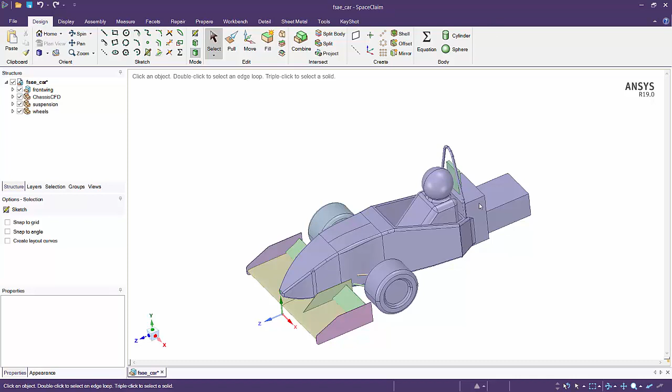So we've just deleted everything that wasn't relevant. We've got the front wing, the wheel, suspension components, and the chassis as well.

How is it on your end, by the way? Is it a little bit laggy, Tim? Yeah, it jumps around a little bit when you rotate, but it's mostly not too bad.

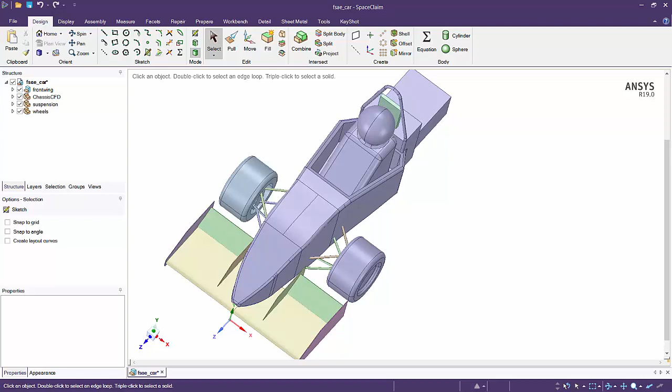Awesome. So for reference, this is a geometry that I created specifically for CFD, because we didn't have anything, and the CAD that we had was just way too dirty for me to actually use.

So before we do anything, before we create a domain, we're going to go into the repair tab at the top. In my case, on the left-hand side, I've got all solids, the structure tree, and I've gone through and actually named everything. So I'm not going to need to stitch or remove any gaps or fill in any missing faces.

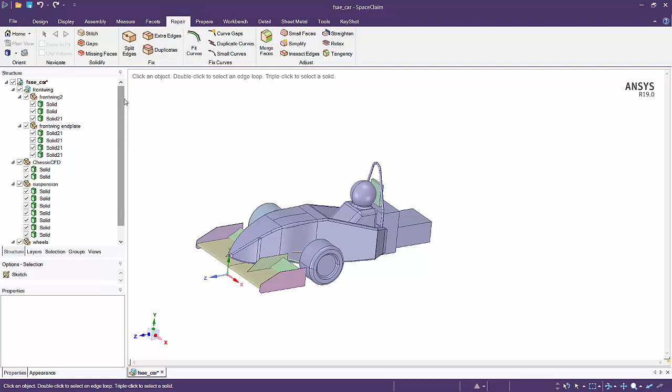If you did have a surface, you'll see that come up, it'll actually say surface, and you may need to do that. One of the things I might need to do is fix my split edges.

So I'll go through from the left-hand side, normally clicking on split edges. I can see here there's a note saying 2 split edges found. I can click on each point to simplify, or just fix them all using the complete button.

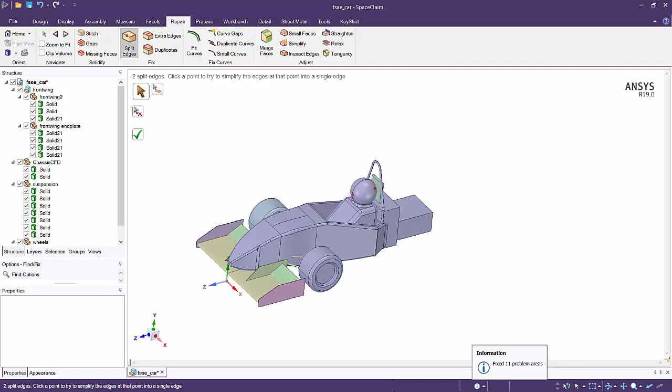So if I select that, on the bottom you can see it was just loading, and on the right-hand side it shows fixed 11 areas. Afterwards I can go through and individually select these buttons to tighten the tolerance. I've also got some options on the left-hand side if I wanted to increase the tolerances even more, but that's not really a big issue, so I'm just going to escape out of it.

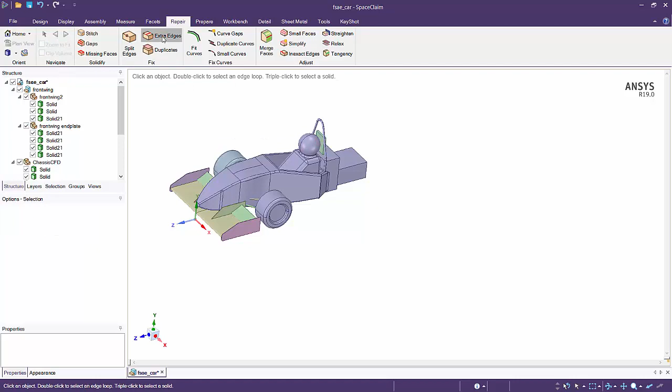If I've got any more extra edges, you can see we've got a couple that have come out. So instead of going through them individually, I'm just going to click the tick button, and you can see it's resolved all of them.

Awesome. I don't really have any need to fix any curves, not really going to need to merge any faces. This is an important one though - fixing any small faces.

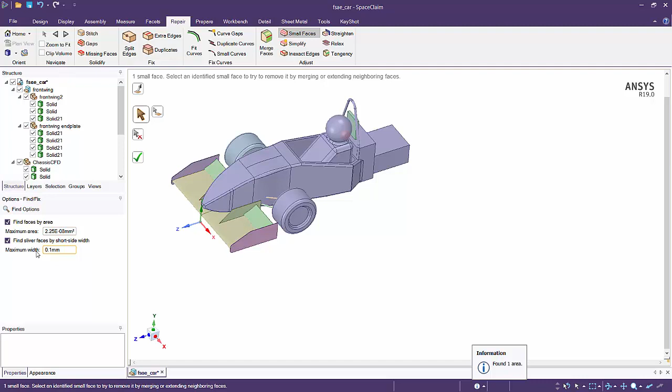On the left-hand side, we can see we've got a maximum area, or a sliver face area as well. In this case, if I rotate the model over, we've just got a really small face that if I click on manually, it should close itself up.

Again, if I need to simplify anything, I've got a couple of things I can simplify there, but I haven't found it to be a big issue, so I'm just going to leave them. And there's inexact edges too - these are all things you personally may not see, but the solver, the geometry modeler, and the mesher will definitely pick up. So it's important to go back and make sure you fix them all.

And that's pretty much it for the moment. So I've gone through my whole repair tab, and now what I'll do is go into the prepare tab at the top.

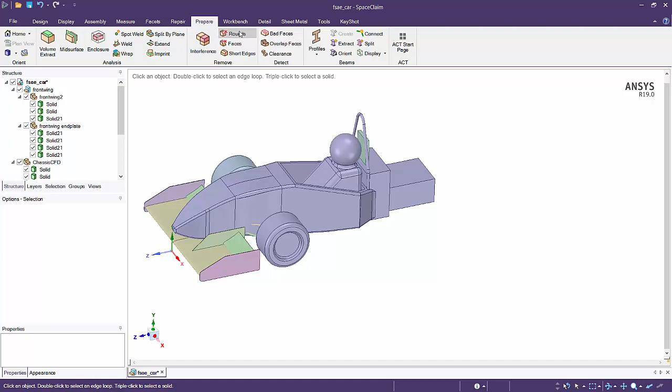So you can see I've got this enclosure function here, plus a couple other functions I can look at and use. There's an interference tab, and I can delete rounds, faces, remove short edges.

So if we select on that, we can straight away see there are a couple of short edges that have been picked up, and I can increase the max length if I wanted to. For this particular case, I'm just going to tick complete.

Awesome. If I need to detect anything, I can do it here as well.

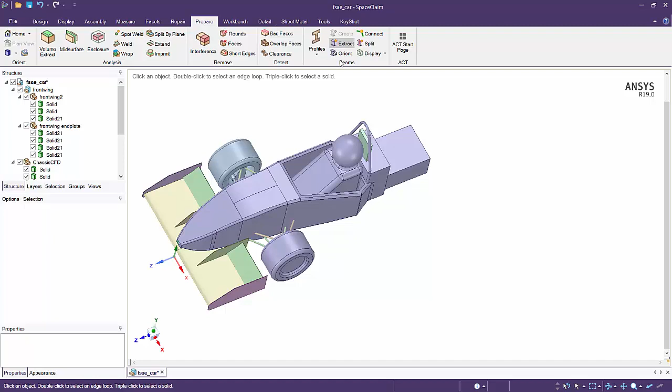So as we were previously talking about, we're just going to set up a model that's parallel to this car, so it's just going to be going in front. Due to that, we can take care of the fact that this whole model is symmetrical.

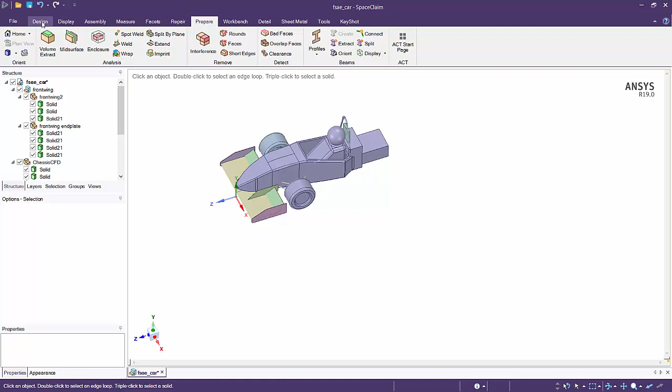So we can actually cut the model in half and run a half car model. I'm going to go over to my design tab at the top. I'm going to create a plane down the YZ axis, and split my body down the middle, then delete one half. To create a plane down that axis, I'm just going to control select Y and Z, hit my plane button. Awesome, and I've created my plane there.

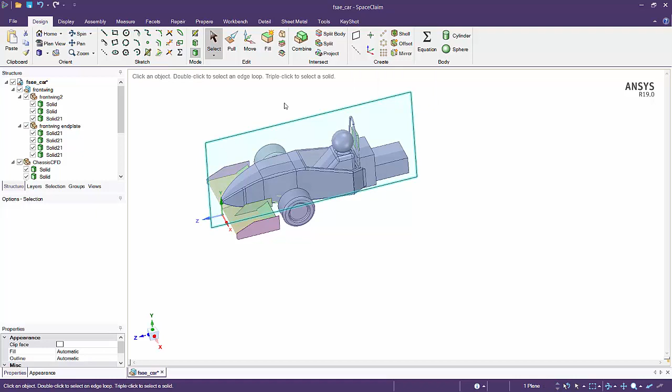On the left hand side, if I just minimize all these, you can see there's a plane that's been created. You can see exactly where it's highlighted and where it splits down.

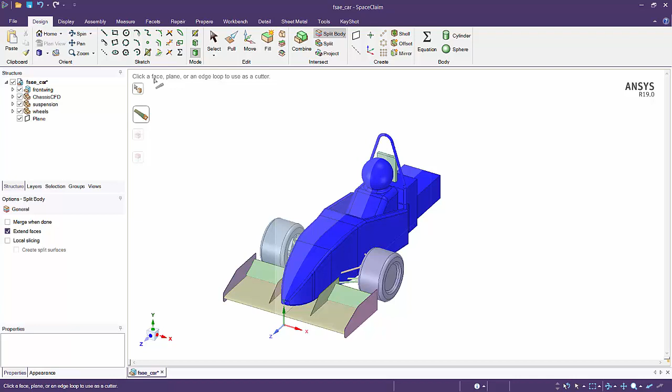Now what I'll do is split the body. I've got a split body function here. It's telling me I need to click the target object first, so the first one I'm going to select is the chassis itself. Then it's asking me to select a face, plane, or edge. On the left-hand side, on the Structures tab, I'm just going to select that plane. You can see it's cut in half. If I have a look at my chassis, I can see I've got two bodies now.

And it's also allowing me to remove a region, so I'm going to select the left-hand side. I'll click it, and I can remove it straight away.

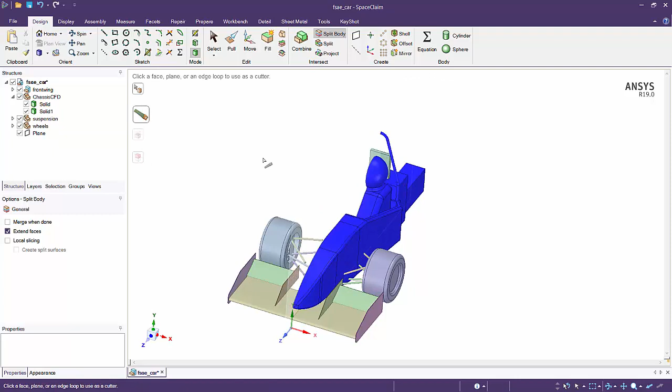All right, let's have a look at this wheel over here as well. I'm going to delete that in a different way. I've got the suspension. If I highlight one of the bodies on the left-hand side, you can see that they highlight in the geometry plane as well, so I can see I've got one highlighted there, and if I right click, I can delete it.

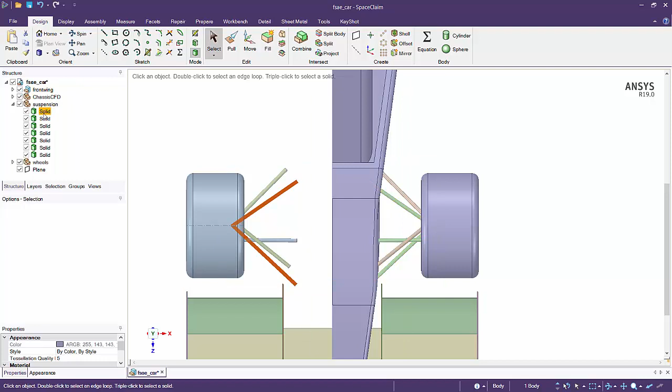Now this top A arm, instead of clicking it, as soon as I highlight over it on the left-hand side, the structure tree lights up as well. But what I can do is triple click it, and you can see the whole body lights up. I can see on the bottom right-hand side I've got a selection filter telling me one body is selected, and instead of going right-click delete, I'm just going to hit the delete key on my keyboard. It's super easy to delete all of that as well.

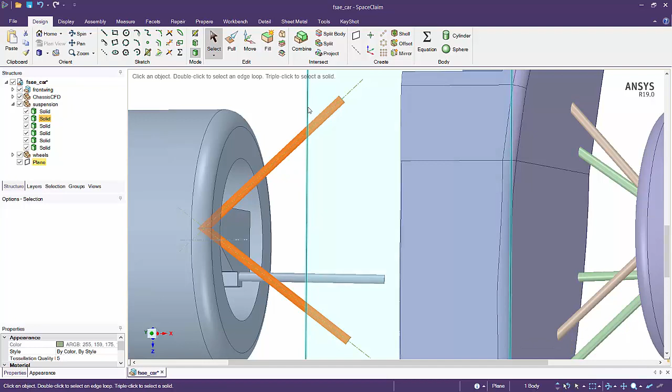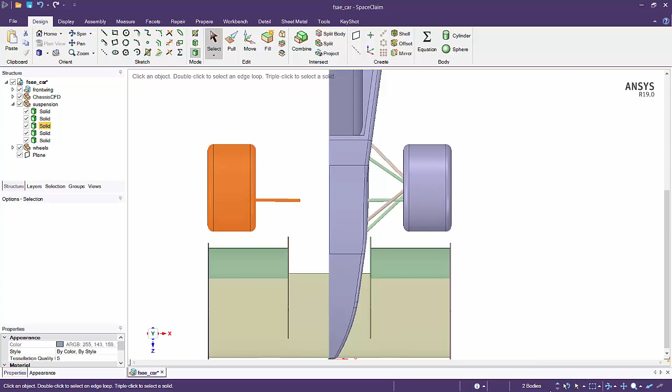Another way to do it is I'm going to select this whole wheel. If I create a box select from the bottom right to the top left, I'll select the whole body, and you can see I've selected two faces here as well. So I'm just going to click out of that and redo it. I've selected two bodies now, and I'm just going to hit delete. Awesome, so I'm just cleaning up the model as I go.

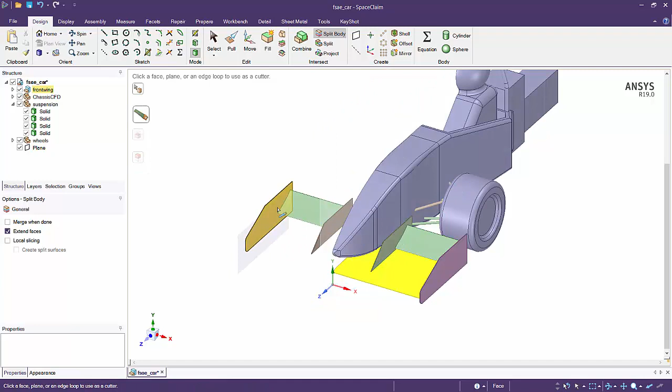Again, I don't actually need this, so I'm just going to triple click, hit delete, and I've still got the wing, which I haven't cut up. If I triple click on that, I can see the whole body lights up. So again, I'm going to go split body, select this, I've got my plane, and I'm going to remove that. I'll escape out of it, triple click this, triple click the wing and the end plate. I can see on the bottom right I've got three bodies created, and I'm going to delete that as well.

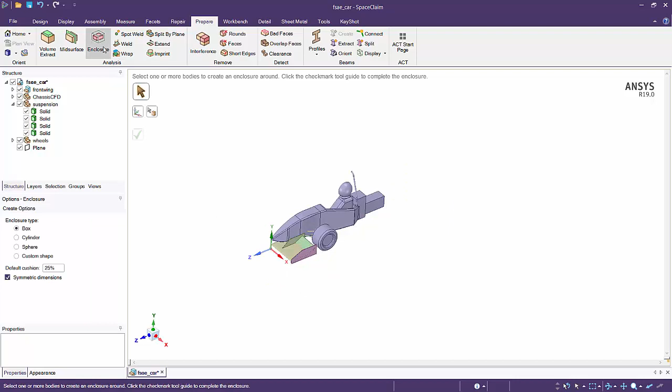All right, so now I've got my geometry prepared, and I'm going to create my enclosure. I'm going to go to the Prepare tab, select Enclosure, select all the bodies, and I've got an enclosure automatically created for me.

Now on the left-hand side, you can see that I've got some options. I'm not going to make it symmetrical, so you can see I've got a lot more tabs that come out. The very first one is just the inlet dimension. The length of the car is around 3 meters, so I just try to make sure if I'm making any dimensions, I make it as dimensionless as possible, almost.

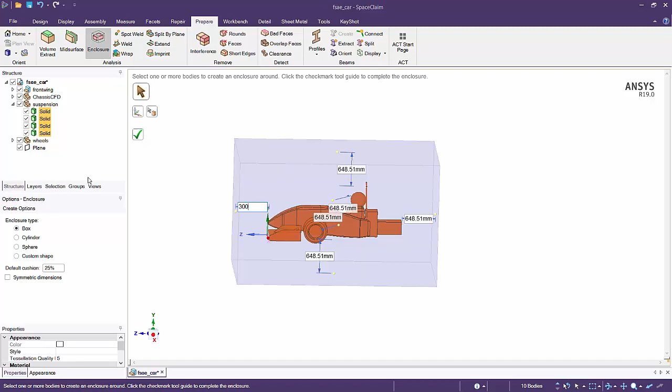So I'm just going to bring it 3 meters in front. I hit tab, and I can see it goes over to my next one. Now I actually want to cut this in half, so I'm just going to leave that as is, and I'll cut it manually. Again, so the width, 3 meters on top. Right, I've got the height, I'm just going to make the height 3 meters as well.

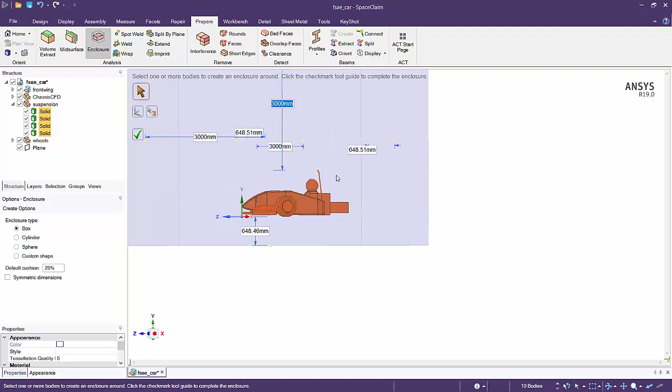So beneath the car as well, I'm going to leave that as is, and I'll cut it manually with another plane. And behind, I'm just going to make this 9 meters. So I can see I've created almost all my domain, and I'm just going to tick the tick button to complete it.

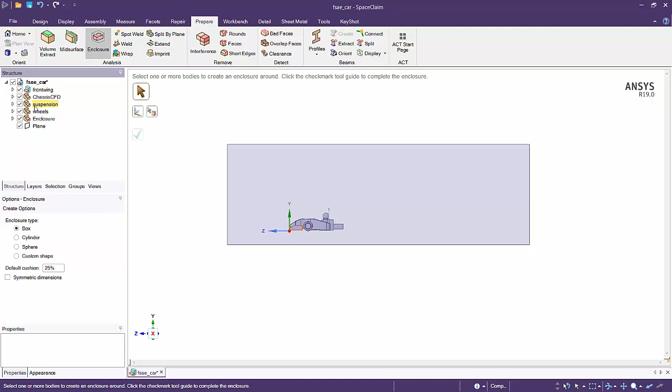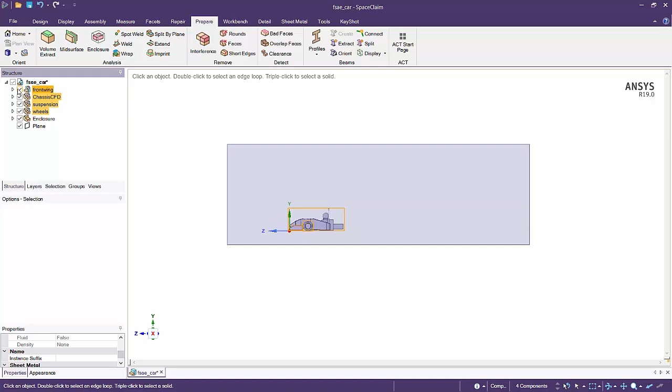What I'm going to do as well is select all these geometries on the left-hand side, right-click, and suppress for physics. This will mean later on when I'm bringing the geometry back into my solver, I'm just going to bring in the actual enclosure and the bodies of influence which I'll create. I'm not going to actually bring in the bodies itself because I don't need them. And if I unselect these buttons, they're going to hide them as well.

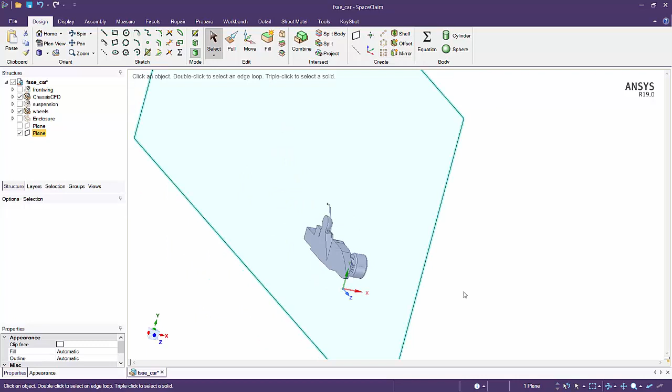So before I do that, I'm just going to hide everything. I'm going to show my chassis and my wheels, because what I'd like to do is create a plane down the middle. So I'm going to select that face, design, hit the plane function. It's going to create a plane for me. And I want to create something around the wheels as well.

So I'm going to select these two axes, create a plane, and orientate myself. Then if I hit the move function, this will allow me to move the plane up or down. Now I'm just going to go back, and instead of moving it up or down using the triad system, I'm going to give it a value. So I'm going to type in -5, which is going to bring the whole plane up by 5 mil.

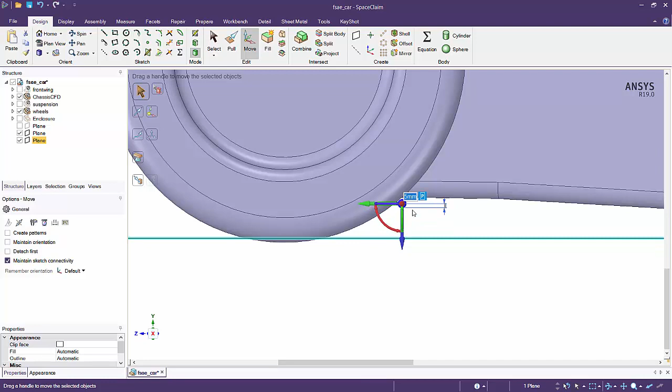Now that I've created my 2 reference planes, I'm just going to get rid of everything. I've got my enclosure here and my 2 planes, and I'm going to cut my geometry up against that plane. So split body, select the plane, remove that. Now, instead of exiting out of it, if I hit Control, I can select the target body again, select my new plane, and remove what's underneath.

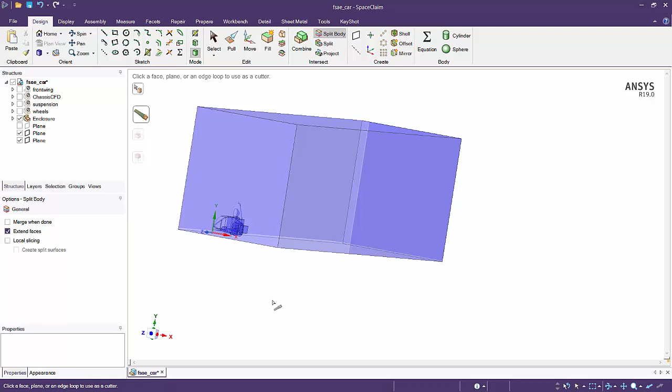So I'll do that again. I remove underneath. All right, I'm just going to hit Escape to escape out of it, and I don't actually need these planes anymore, so I'm going to hit Delete.

Awesome. All right, so I can see a couple of new guys that have come in as well. We'll, as we were just talking about, record everything and send it out to you so you don't miss anything.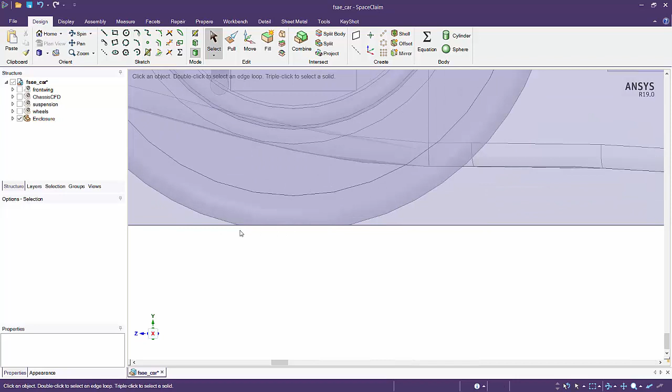All right, so I'm just going to have a look at my plane as well. So I'm just going to hide these faces. In 19, we've got the function in SpaceClaim to highlight surfaces, right-click, and hide the faces. Now, we've got this sharp angle here between the wheel and the ground.

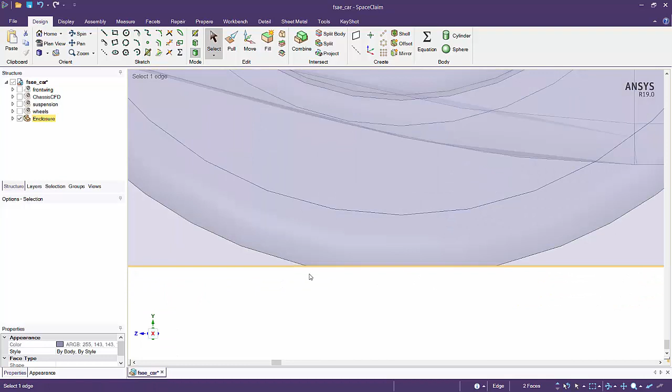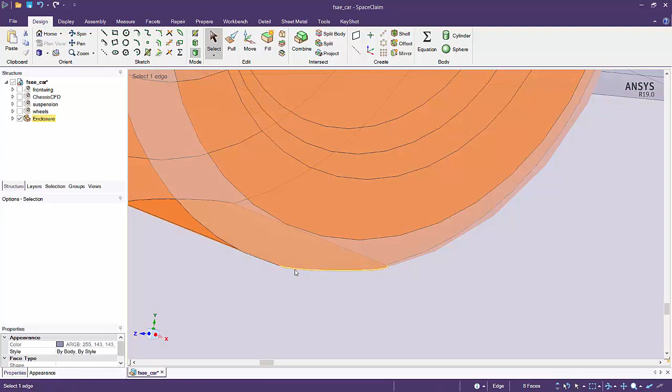So that sharp angle is going to create skewed elements. So what we're actually going to do is zoom out a little bit, then focus back in. So what I want to do is select this line here. If I double click on the line, it'll auto select all those edges, and I'm going to press the pull function.

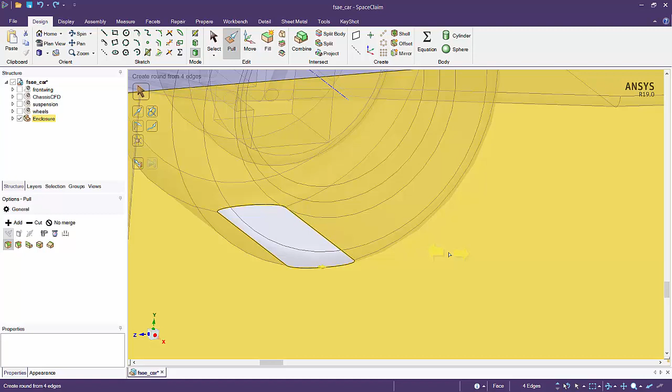And what I'd like to do is create a round, so I'm going to create a fillet. If I pull on that, it'll create a fillet for me. That's way too big, so I'm just going to go back with Control Z. Instead, I'm going to hit spacebar. You can see I've got a prompt that comes up, and I'm going to give it a 4 mil radius. So you can see what you've done there.

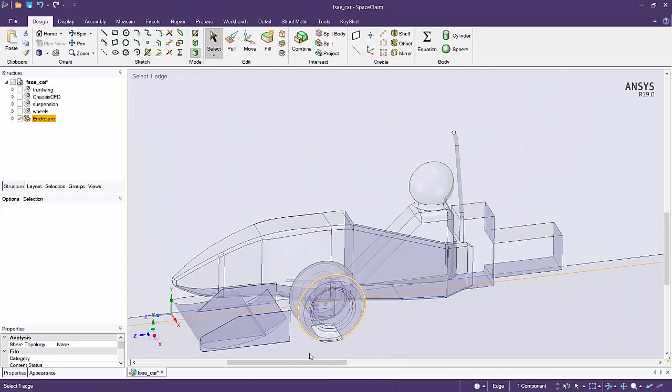And now I've almost got my enclosure ready. So I've got the enclosure, there's no solid bodies in there, it's just a fluid domain. It's taken everything out. You can see here I've got radiuses around areas that I think will cause skewed elements. But the other thing that I need to do is have 2 bodies of influence, a near body of influence and a far body of influence.

So at the structures tree on the top left-hand side, I'm going to right-click and ask for a new component. I'm going to call it BOI, body of influence, far. And what I'm going to do is create a rectangle.

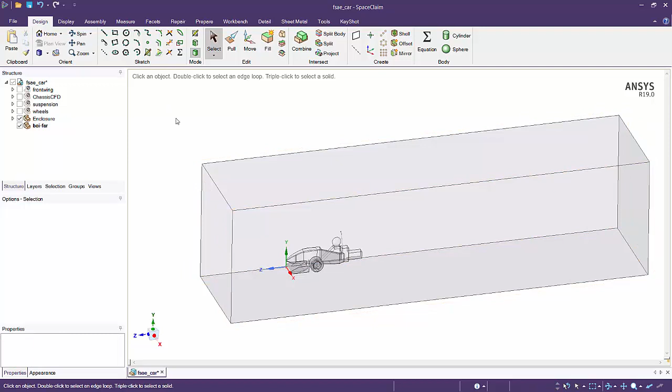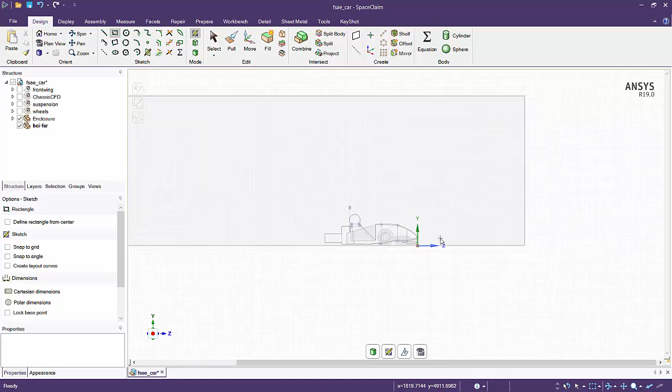So I'm going to orientate myself around, select the plane. You can see that the BOI-far is bold, so that component is currently active. And I'm going to create my rectangle here, orientating myself using the triad on the bottom left. I'm just going to click bottom left here and create a rectangle for me.

I'm going to exit back out of it to 3D mode and orientate myself around. I'm going to select this surface. I've got the pull function already selected for me, and I'm going to pull it to the left-hand side.

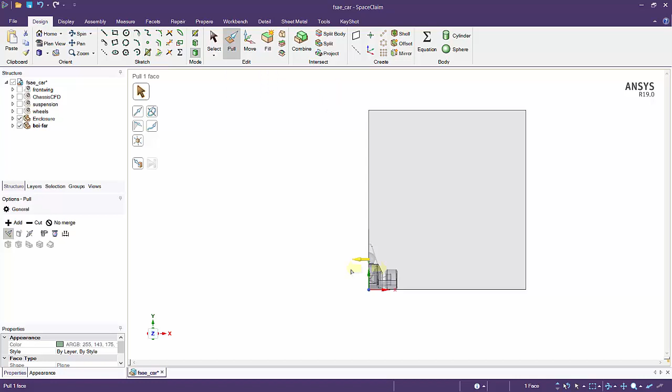I'm just going to triple click, and you can see I've got this pop-up that comes up. I'm just going to make it transparent. Cool, so now I've got this domain that I've created for myself.

Now, the main part of this domain is just to capture the wake region. You might not quite understand how big the wake region is initially, so just create the body of influence, check your post-processing results, and you can go back and extend it if you need to.

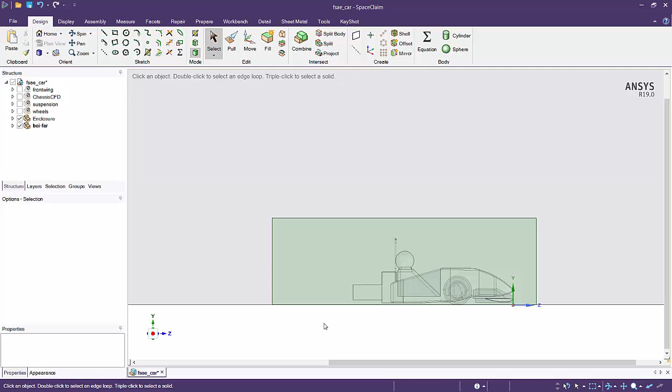I've extended it a little bit far behind to capture the wake, and got a little bit in front as well. There's no rear wing, so that's not a big issue. I've brought it a little bit in front as well, and I've brought it a bit wider than the car because I know I'm going to have some sort of vortice that comes off the wing and the wheel as well. So I'd like to be capturing that.

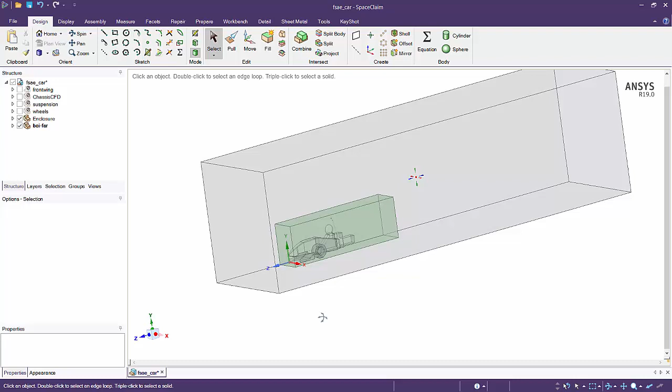Now I'm going to exit this and create my second body of influence around the front wing. Again, right click, new component, BOI-near.

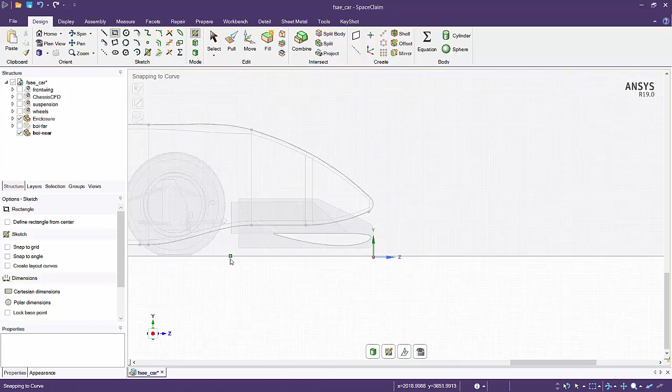I'm going to select that surface again. I'll go R for rectangle, orientate myself. This is just going to be around the front wing, so I might want to select it around that area. I'm going to pull, and then pull this out.

Cool, just going to hit escape. I'm going to make this transparent.

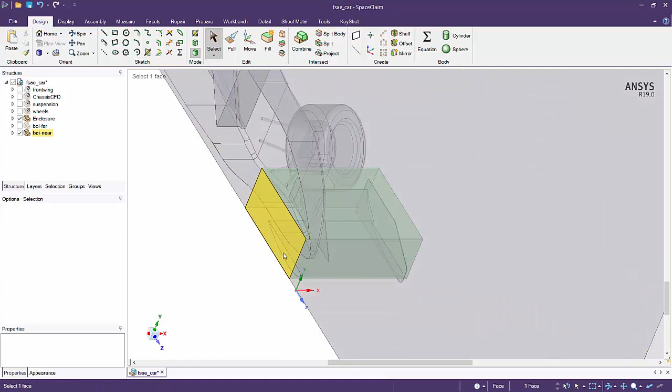Now, if I'm going to make this a finer body, I don't actually need the body to be finer around the chassis there, so I'm just going to pull that bit in. I'm just going to look on the top until it's around that end plate. Awesome, I can see I've got a little bit left over there as well.

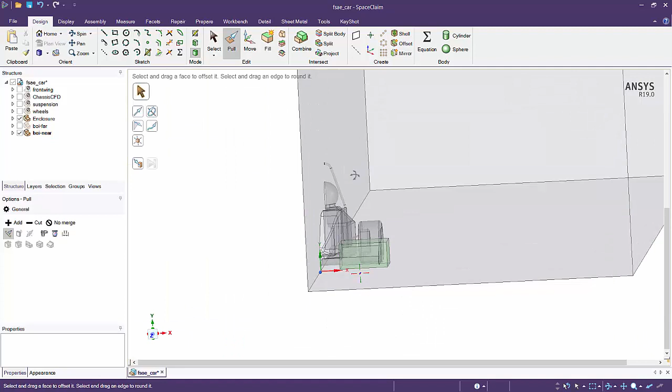So if I have a vortice coming out on the right hand side, it's going to capture that. And if I look underneath as well, I can see it's on the bottom.

The next thing I'm going to do is create some named selections so I can do all of that within SpaceClaim. First off, I'm just going to go right click, show all, and unselect the bodies that I'm not interested in. I just need the bodies on that.

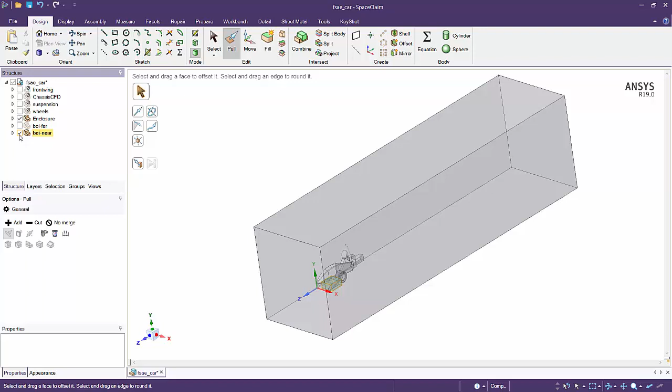I'm going to right click on the enclosure and activate that component. Then I'm going to go into my groups tab. I'm going to select a face, and hit create group.

You can see I've got a group created on the left hand side, similar to a named selection. So I'm going to highlight that, right click, rename, and call that inlet.

Now I've got a symmetry boundary condition here. You can see when I highlight over something, you can read the description, and there's also a keyboard shortcut, Control G. So I'm just going to hit Control G. Again, group created, and I'm going to select that.

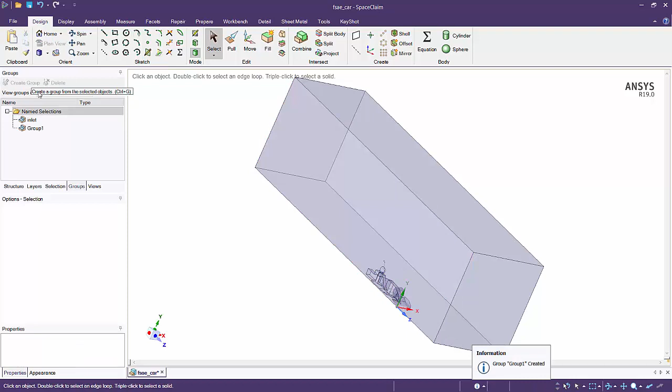Instead of right clicking and pressing rename, I'm going to hit F2, and I'm going to give it symmetry.

And then I'm going to do the same for these two components here. Again, Control G, F2, wall.

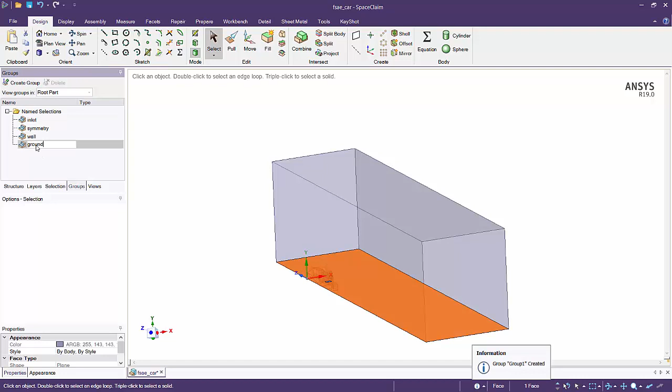I'm going to give the ground a different boundary condition, and I've got my outlet all the way out here.

Awesome. And what I might want to do, I'll definitely want to do later on, but I'll do it now: again I'll just unselect these, select these faces and hide them. I'd like to select the wings because I'd like to do some sort of sizing just on the wings later on and also the wheels.

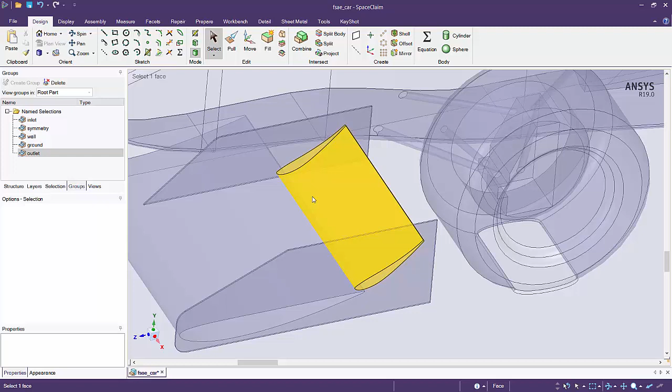So I'll hide the bottom face as well, and just look up top. Cool, so I'm going to just angle myself in. Now with the box select tool, I can do two versions of it. If I go from the bottom left to the top right, it will start to select the whole surface within that box.

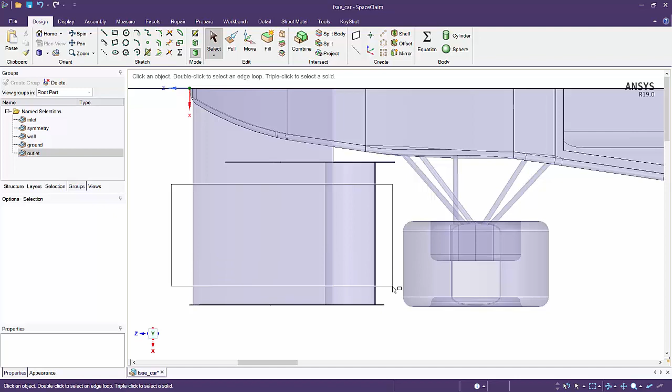If I go from the top left to the bottom right, it's only going to select surfaces that totally encompass that box. You can see the wings aren't selected in this case, but the end plate is. So I'm just going to have a look at that wing.

Control G. What I'm also going to do is have a look at this wheel. I'm just going to box select that whole wheel. Now I don't want the stand, so it hasn't picked that up.

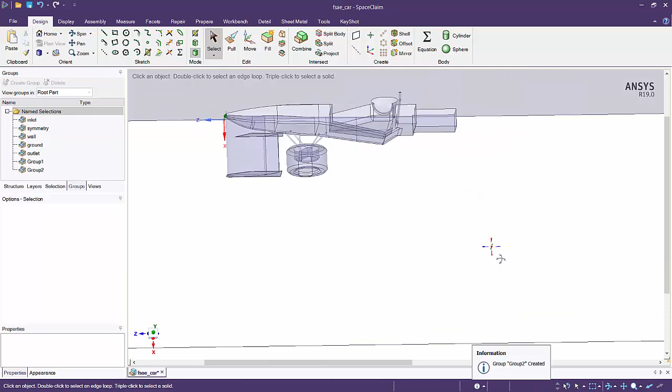In my experience, because I go quite coarse around the chassis, the rods start to lose their definition. So I'm just going to select these rods, and I'm also going to select the roll hoop as well.

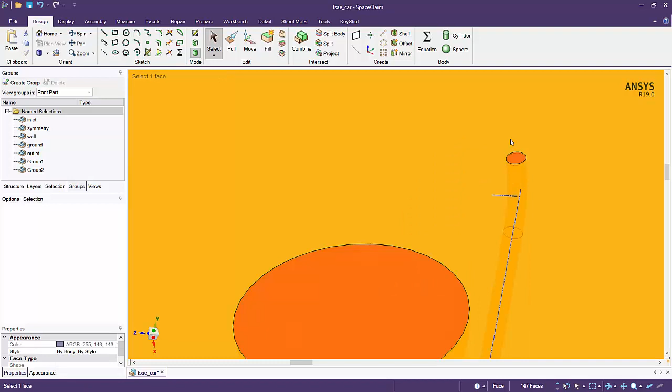I've got a small face here, which... whoops, that's selected everything for me again. I'm just going to go up and redo the selection.

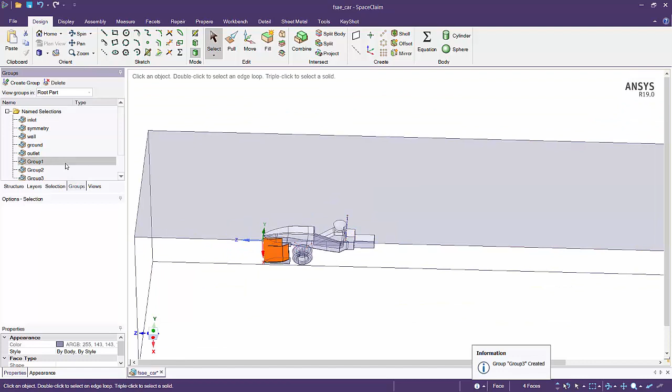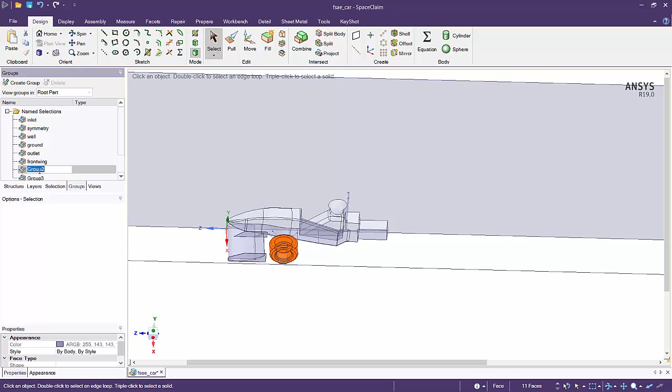Control G. On the top left-hand side, you can see as soon as I touch select group 1, the actual name, the faces light up. So I'm just going to hit F2 - front wing. I've got group 2, which I'm going to hit F2 again - wheel, and F2 - rod.

I'm going to go back to my structures tree. I'm just going to activate this. Right click, activate again. I'm just going to suppress these components because I don't need them.

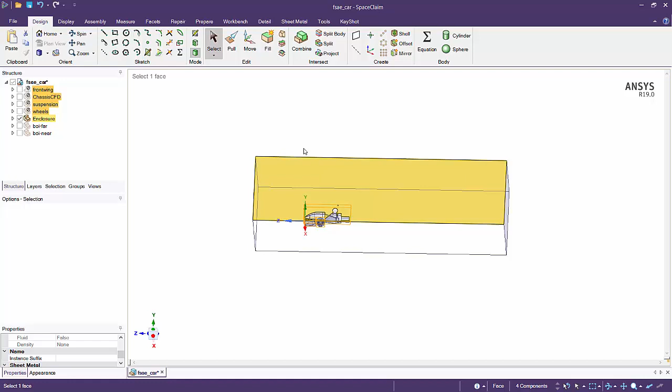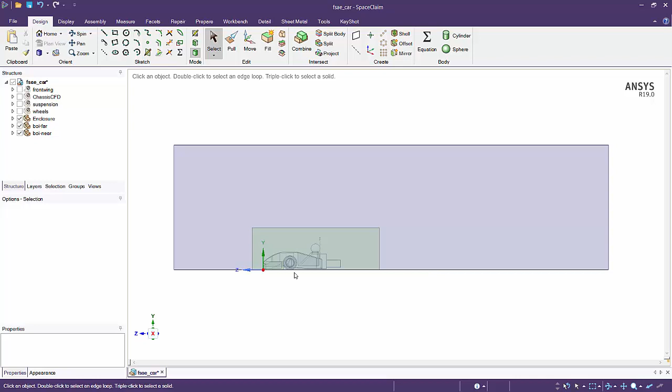If I go show all, I've got my enclosure that I've created. I've got my inlet far enough that the inlet boundary profile isn't affected by the stagnation region. I've got my outlet far enough that the wake region isn't going to cause issues with convergence. And I don't think my height or width is going to affect the flow at all.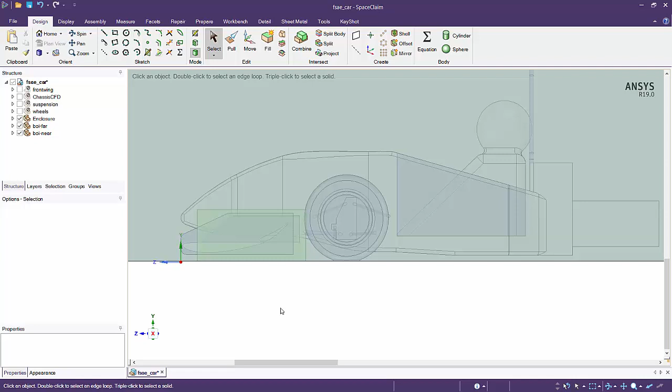I've also got two bodies of influence. I've got a body of influence around the far field, which picks up the general recirculation region of the car. But I've also got a body of influence around the front wing to pick up the vortex structure coming off that. I might also go back later and include a body of influence around the front wheel as well.

So that would be my geometry created. I've created this in 19, but the CAD file on the LEAP academic portal comes in as a step file, so you guys can go through this whole process. I'm just going to exit that - I'm not going to save it in this particular case.

Now I've been talking for around 45 minutes. So if we go back to the front wing, the CFD for FSAE webinar, let's bring that up. Yep, so there I've got the CFD webinar.

On the top right hand corner, we've got training courses, and we want to go to the FSAE CFD webinar. Then we've got a couple of sections here. The very first one is geometry modeling, and if you click on the actual icon, it'll hyperlink and download a repair geometry.

So this is what it'll come out with - it's going to be called Module 3. We've got a couple of things here, so we've got the PDF. If we open the PDF up, this is a part of the ANSYS training course.

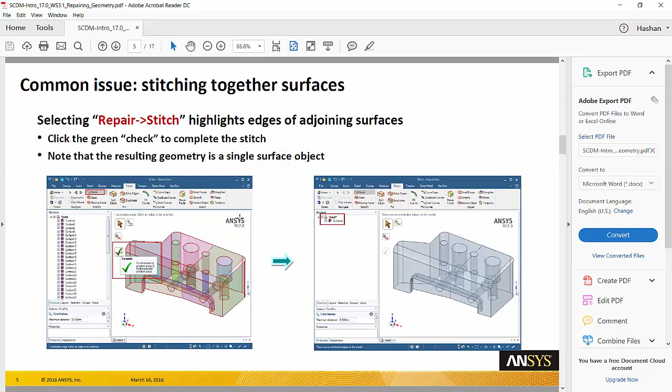So we'll go over repairing geometry, and if we step through it, we'll understand what our key learning points and objectives are. It'll ask you to import the geometry in, and it should go through the functions to help you understand what you can do with the software and how it can help you out. We'll exit that, and we've got the geometry here as well.

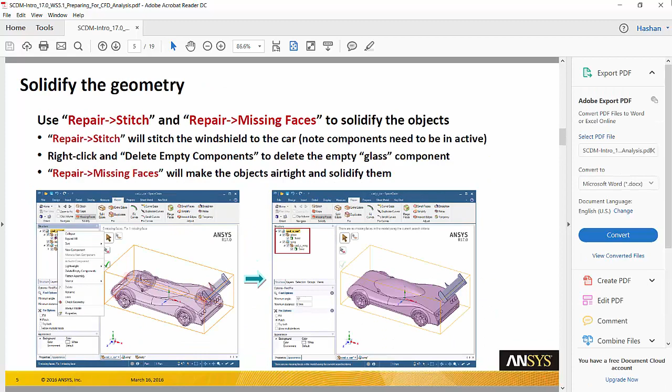After that's done, we'll have a look at the prepare enclosure as well. So again, download, open it up - Module 5. We've got everything with some sort of PDF attached to it, so you can understand exactly how to step through the process. And if we exit that, we've got the geometry sitting there for us as well.